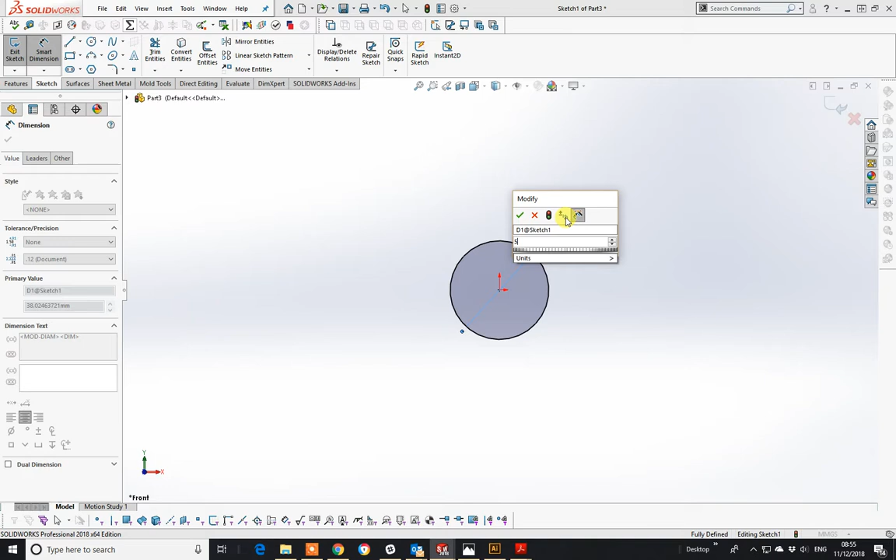Okay, then go to Features, and then go to Extrude Boss Base. Just one second, you'll see what I mean on that, and that is at a depth of 4.5.

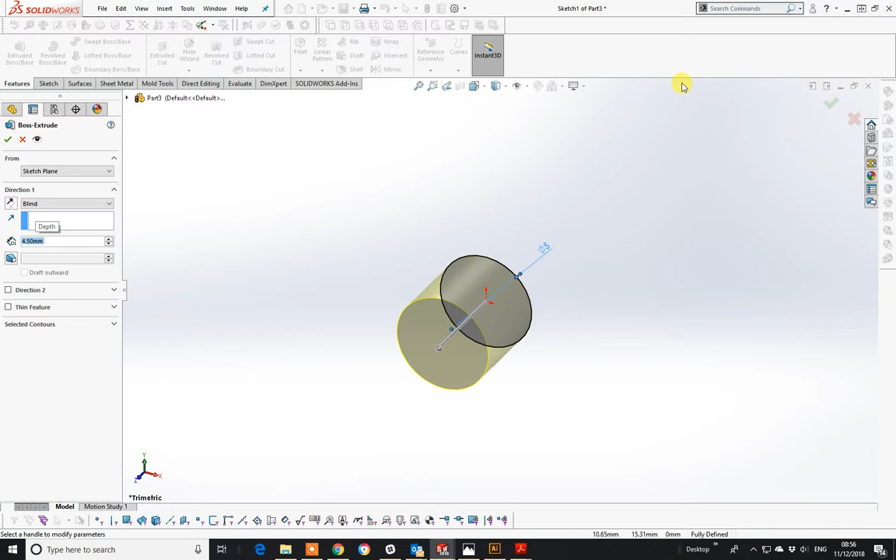Okay, I'm just going to pause. So I've actually created the hand part of that claw, so just press spacebar. I'm going to come in on that end, and I am actually going to put that centre bit in now as well.

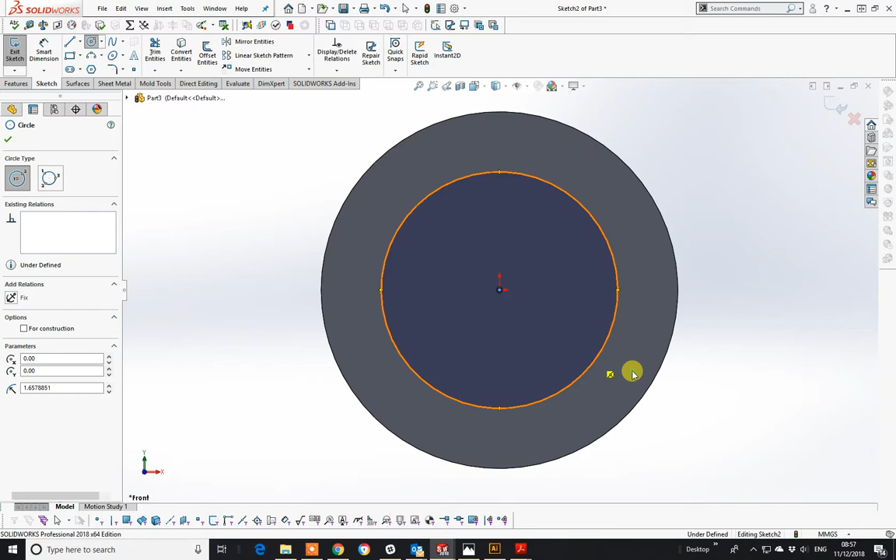So again, I'm going to go to Sketch on there, go to Circle, pull out, and that is a diameter of 3mm. Put that on there, almost.

Okay, and I'm going to Features, Extrude Cut, and when the computer catches up, that's it, and go through all. Okay, and then we've got the sort of main part of the claw.

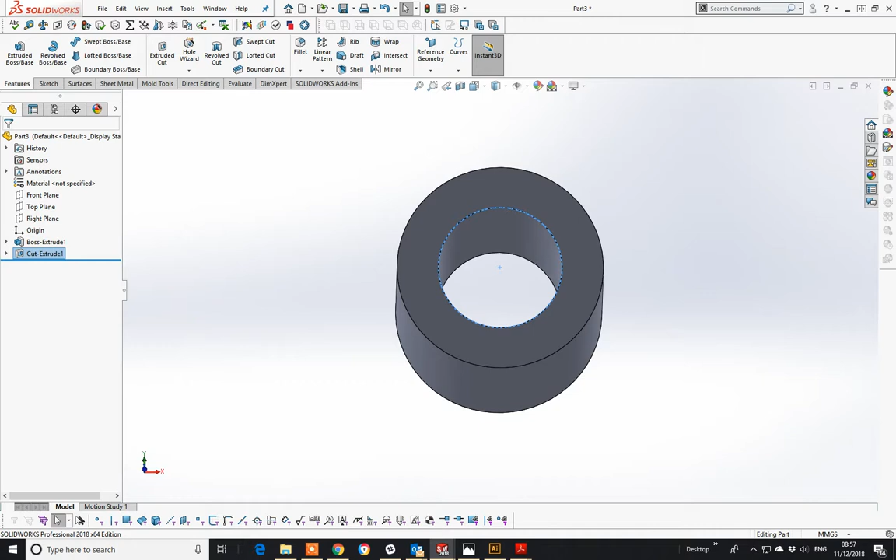Okay, I'm going to draw another line that side. Now, I could do this with a rectangular tool. I just want to show you something on there, and I'll do the same on that side.

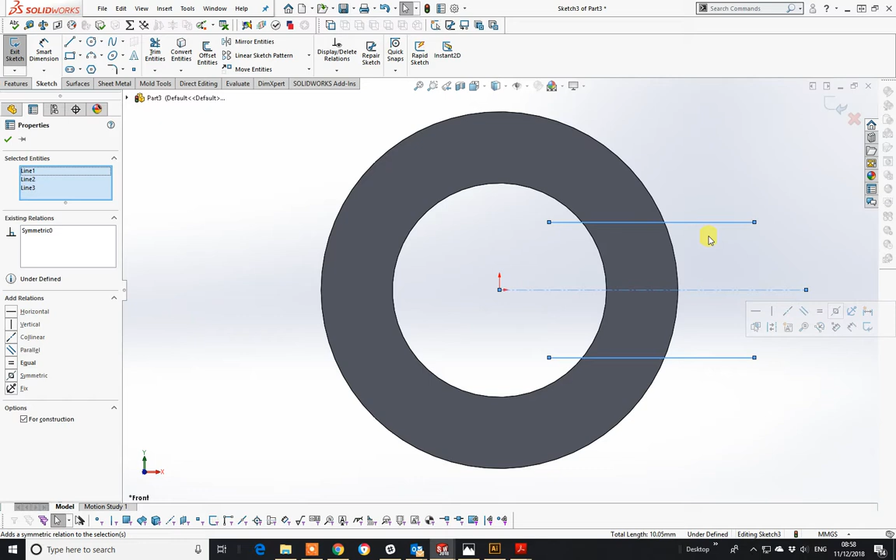Okay, now what I'm going to do is hold the shift key down, select that one, and select that one, and I'm going to make that symmetrical around that centre line, and just draw a line from there to there.

Now yes, these should be defined, but it doesn't really matter at this point. Actually, I will make it defined. I'll just do that on that point there and make that coincident.

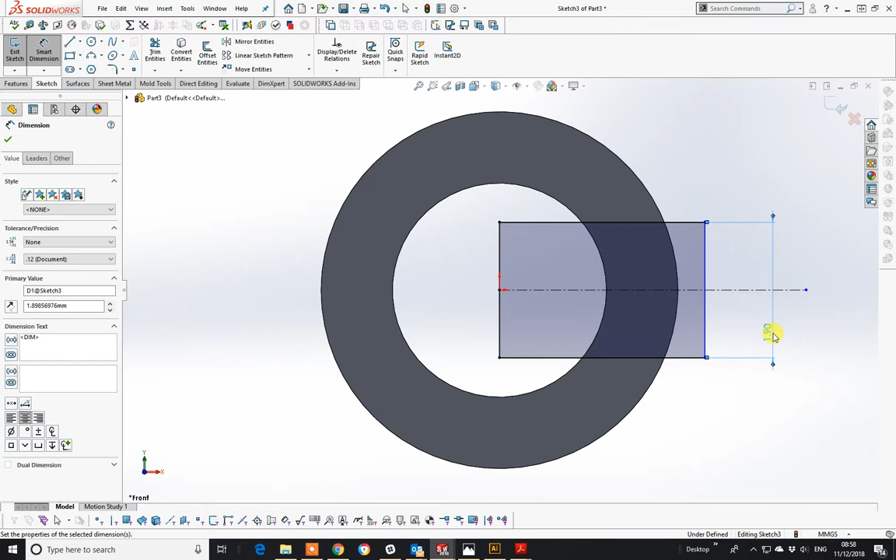Okay, and just to tidy things up, I'll put another dimension into there, make that 3. Doesn't have to be, but I'll do that. If I do that, now I shouldn't have done that.

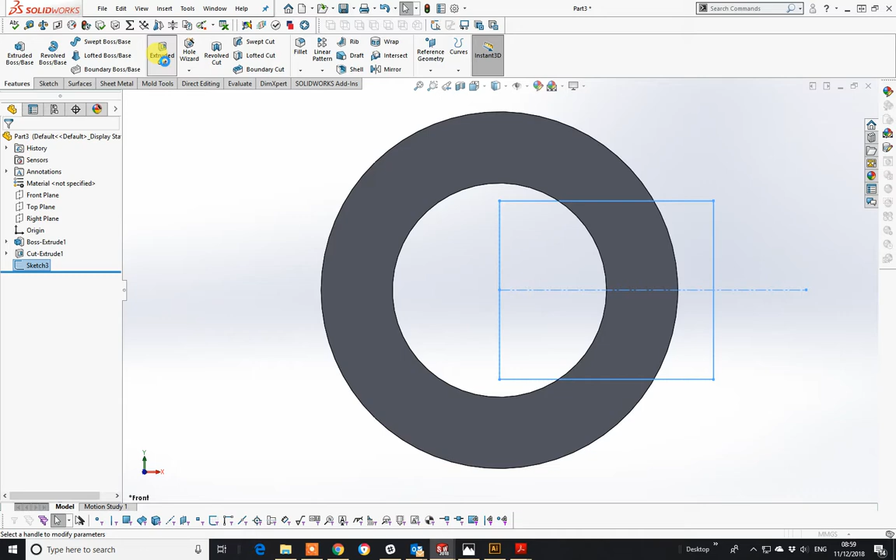I should just go to Features and Extrude Cut again. There you go, and it should maybe select it automatically. It has. Make sure that is onto through all. Okay, and there we go.

I've got that claw part of the hand. Now I need to bring in the next part at an angle, so I'm going to use a different plane for this one.

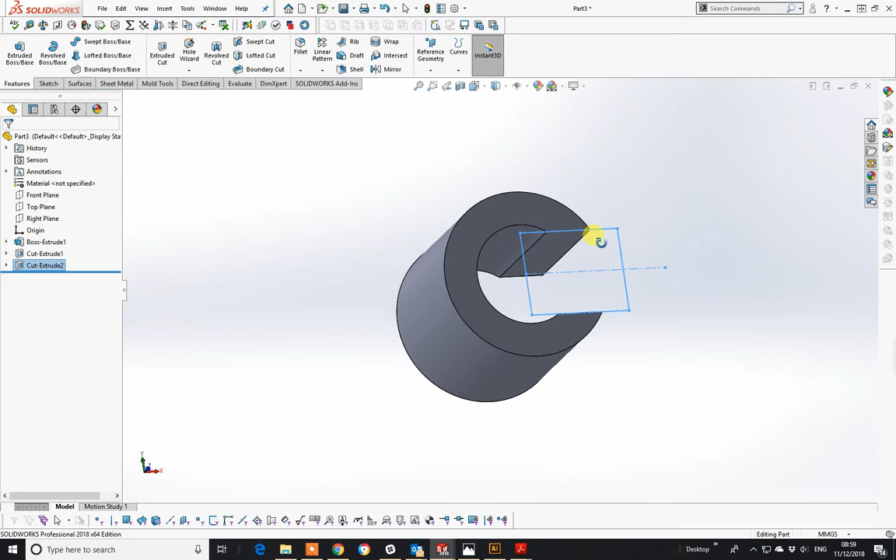So let's press spacebar, going down there, so I've got my side view. If I just change that to transparent, you can see what we're actually going to do.

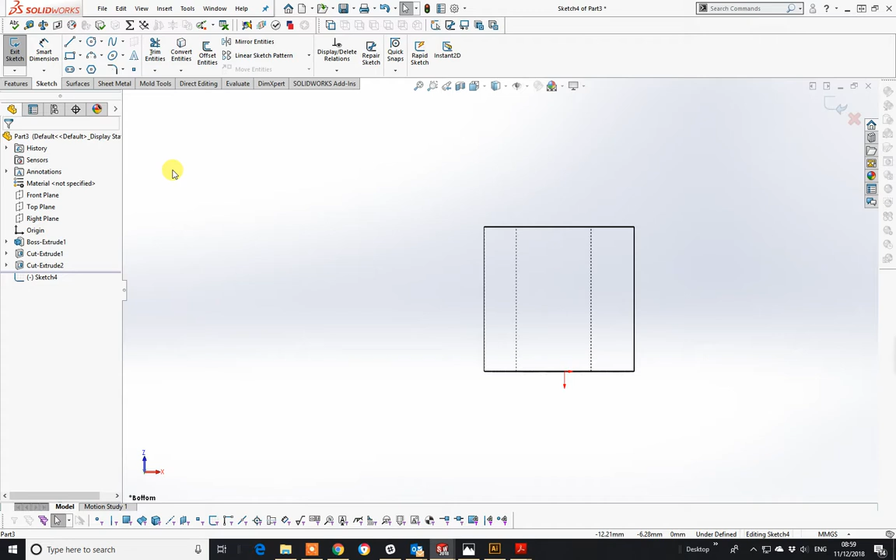And this I'm going to sketch, okay, and I'm going to just look at which plane I want to do this in. So it's not that one, it's that one there, and I'm going to sketch a line roughly from out here somewhere to...

somewhere there. Now I have no idea at the moment. I know what angle that's got to be, so if I just put an angle in, let's put that in there to there at 10 degrees.

Okay, so I know that's there, but it does actually look too big, so that needs to be further out. What else have we got here that I can take reference from?

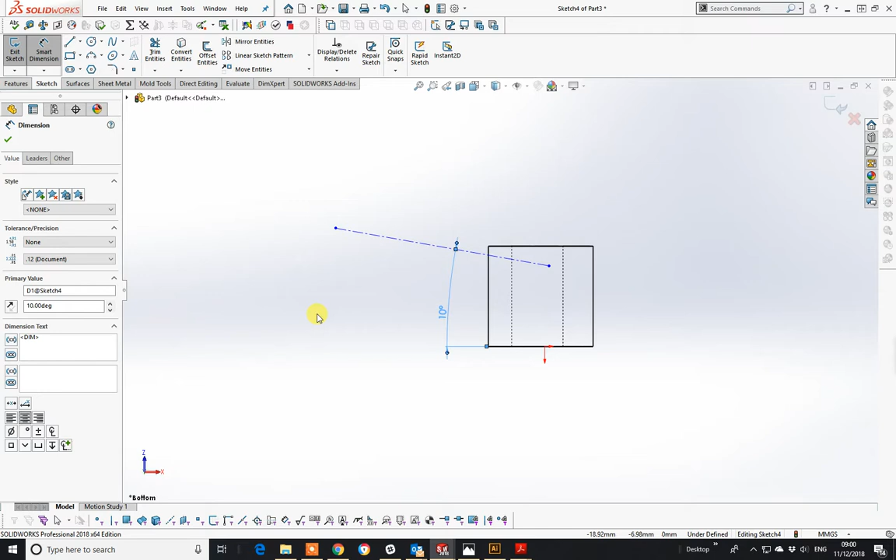Okay, I'll put a construction line of 3. This is the one that goes in at 3mm.

So if I just, this is purely construction - there are some points missing, so do that at 3.

Just to find my point from that and how that interfaces, because I'm looking at the end mark of one of the lines.

So if I actually make - just hold on one second. Okay, I'm going to put a line at 1.9 from the base.

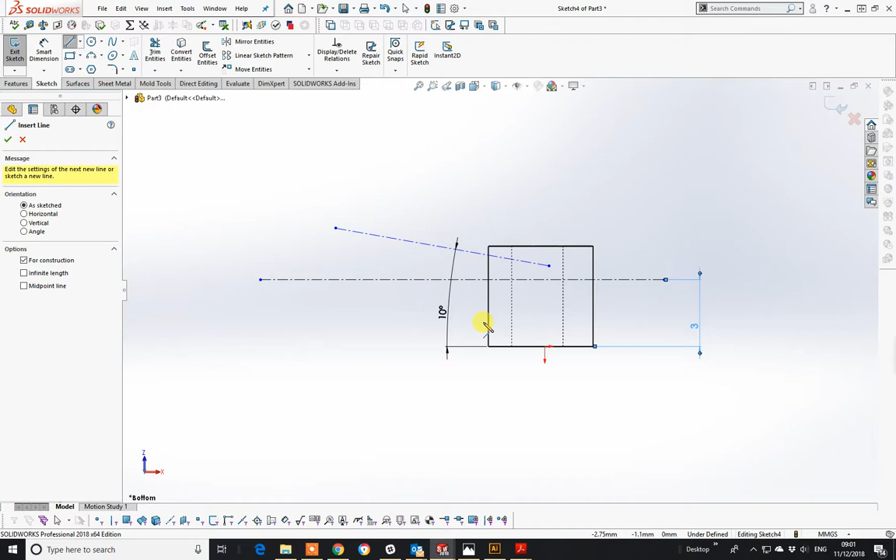So if I just take that line there, as you know, I'm just going to change that dimension there, makes it easier for me, at 1.9.

Okay, right, I've got a point now that I can start from. So I'm going to draw a line from approximately there out to there.

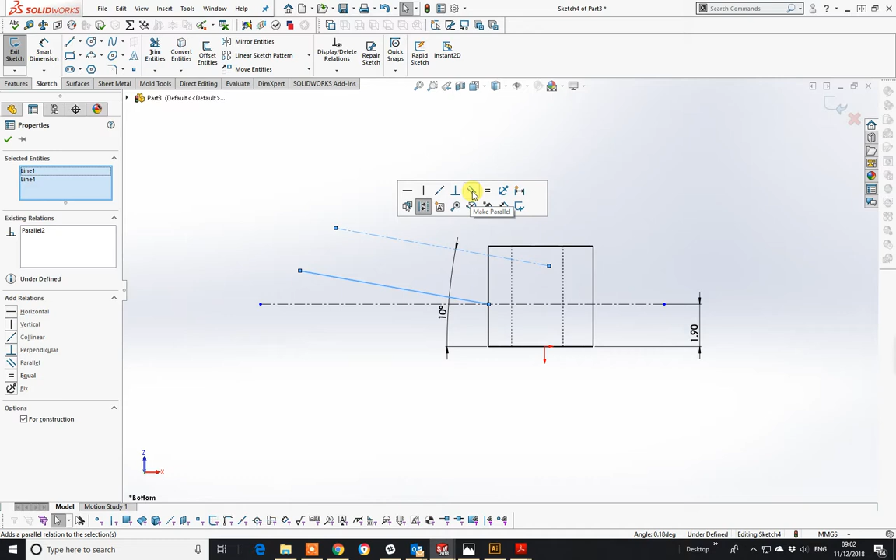Okay, and I'm going to make that line and that line parallel. Okay, take a little bit of time.

Now I know that's 2.6, so that centre line, I'm going to just do a centre line. Again, these are all construction line.

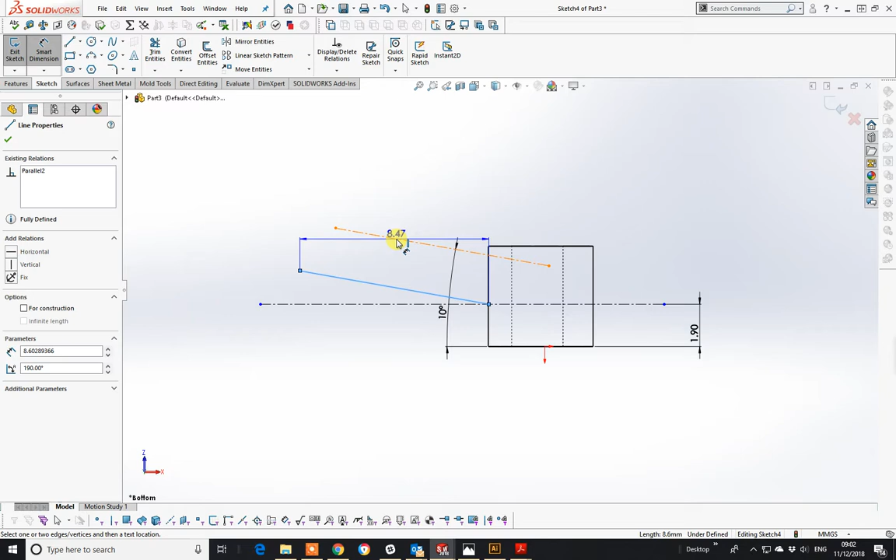That centre line is my smart dimension from there to there. I want that at - and there's a little trick you can do. If I just go 2.6 divided by 2 will give me 1.3. So I now have the centre of where I need to bring that hole in.

And I do apologize for the dog barking.

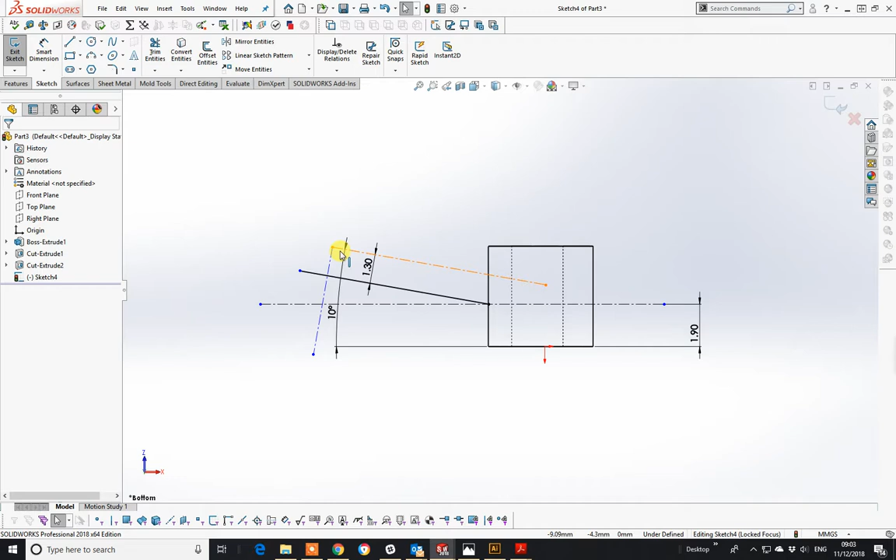I also know that from that point there to a point there is 10.65. So if I draw another center line off the end of that one and bring that down, make sure that I've got a fit there between there and there perpendicular, which it is, that's fine. Now let's bring that line in to be interference with that one.

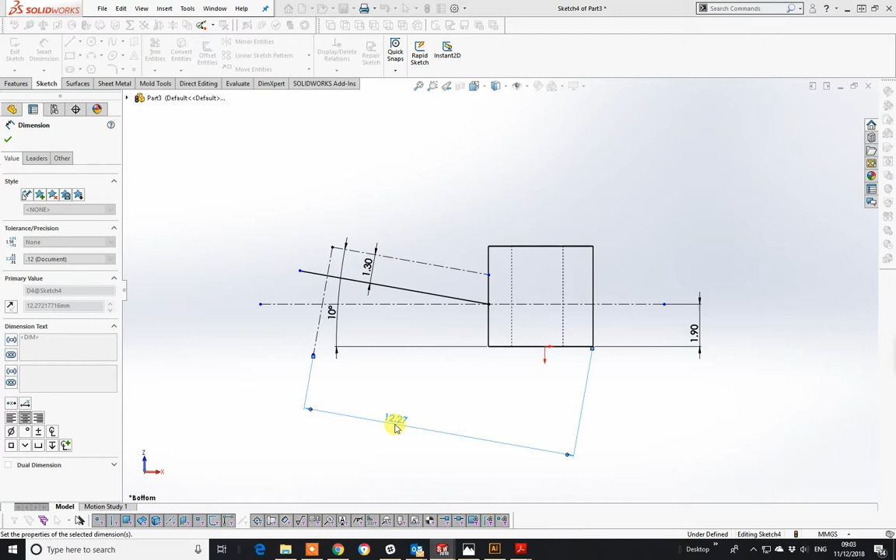Smart dimension from that point there to that point there, and I'll make that 10.65. I now have the end point where I can put my diameters on. Let's give that a green tick, I'll tidy this up later on.

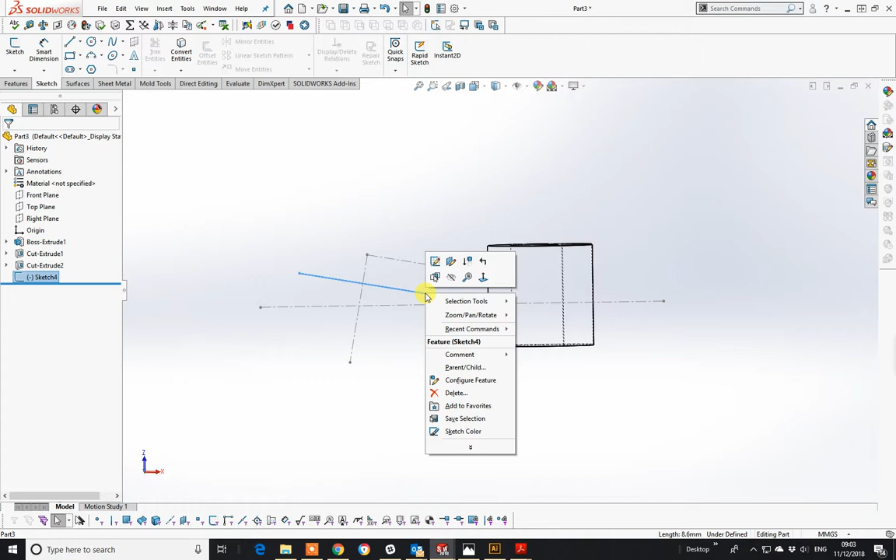I can actually now get rid of this line here. Let's just delete that - no, don't do that. I have to go back into edit sketch. Actually, I'll just convert that, go back into edit sketch, do that one there, and do it that way.

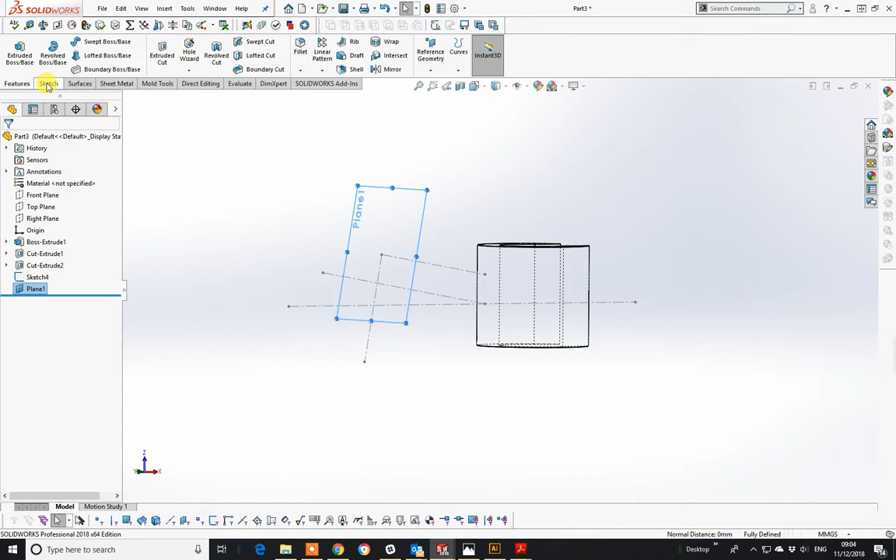I am now going to go to features, go to reference geometry, go to plane, click on that endpoint there and on that line there. I'm now going to sketch in that plane and draw a circle in that point there.

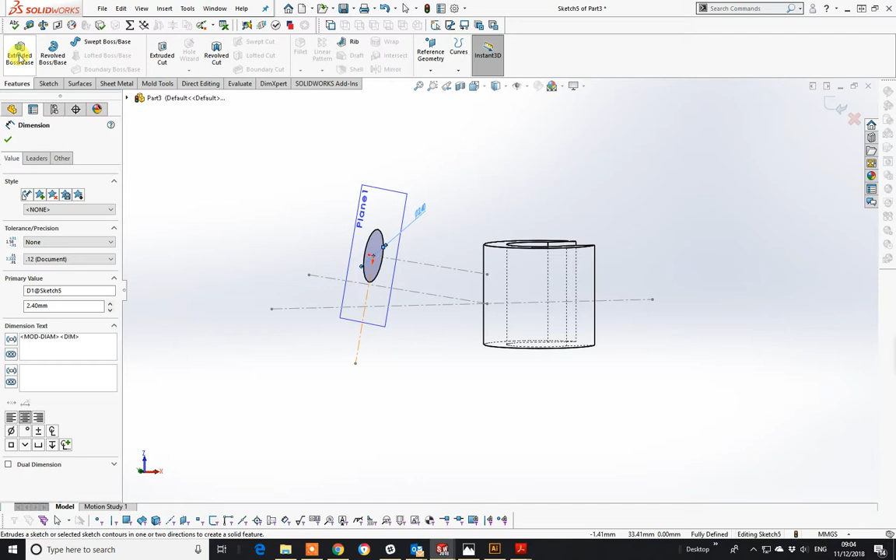I know that that circle, if I just give it a dimension, is 2.4. And I'm going to extrude that by 4 millimeters. So if I go to features, go to extrude boss base - it's just taking its time a little bit - and make that 4 mil.

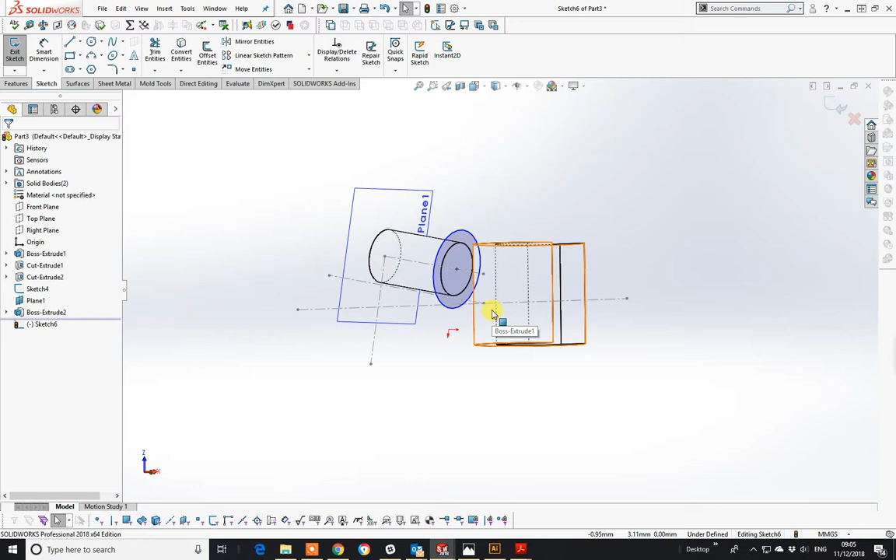That's perfect. I'm then going to go in on the end of this one, so I'm going to go to another sketch on that face and draw another circle from that center out. I know that that is a diameter of 2.6, so smart dimensions - 2.6.

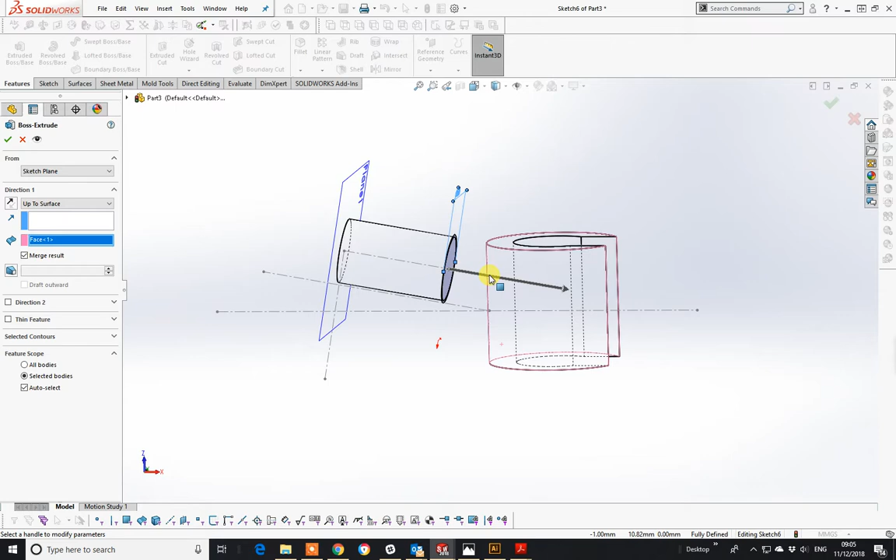Then again features and extrude boss base. It's taking its time, and this time instead of blind, I'm going to go up to surface. I'm going to click on that point there - it doesn't like that, or it's just thinking about it. Let's just see what it does. Yes, it's done it, so therefore we've got our interface there.

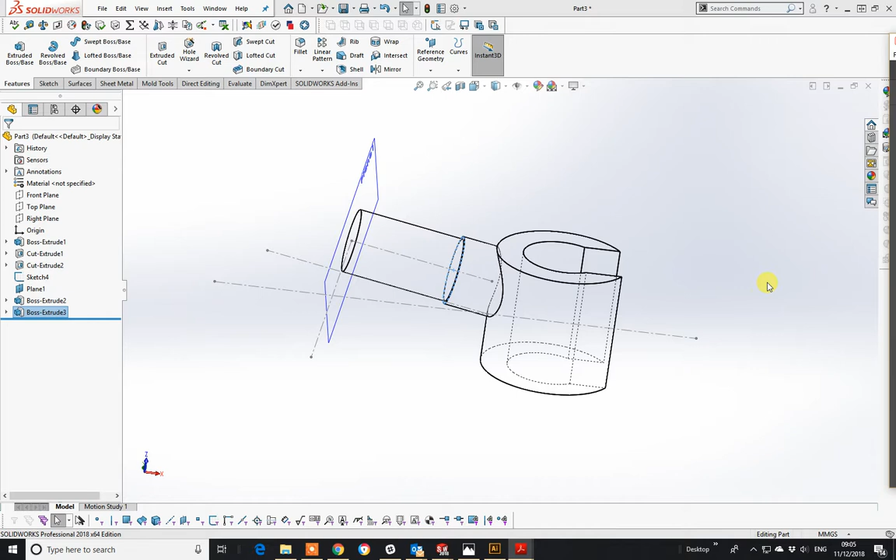Now what we need to do is put on that radius at the front, which is actually a little bit complex, so I'm going to do that in a slightly different way. Let me make sure I'm on the right screen. Here we go - now it's 2 mil round there. So how do we do that?

I have to do that as a cut, I think. Just let me double check that - yes, it's 2 mil. So I'm going to go and sketch in the center plane here again. I go to sketch, choose my plane - right, it's that one there.

And I'm going to draw - let's do a center arc. Actually, I'm going to cheat and do a circle. I can't do a perimeter circle, so I'm just going to do a circle. Just watch this for a second - click on circle, you'll understand in a minute what I'm doing.

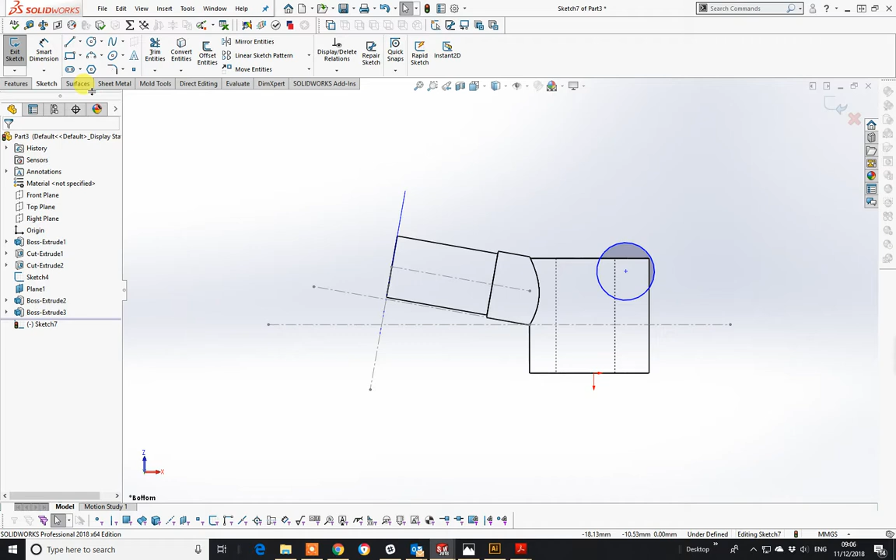Now let's do that as a radius of 2, so smart dimensions - okay, a radius of 2, so that's a 4 mil circle.

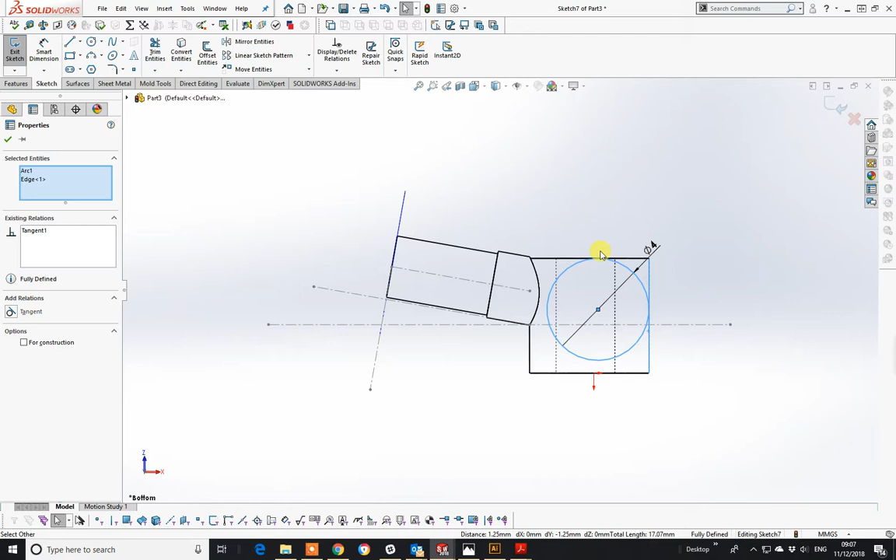I'm now going to click on the circle, hold the shift key down, and make that tangential to that point there. I'll then just press the escape key and do tangential to that point there as well. I've now got that arc that I want to have, but I need to get rid of most of the other stuff.

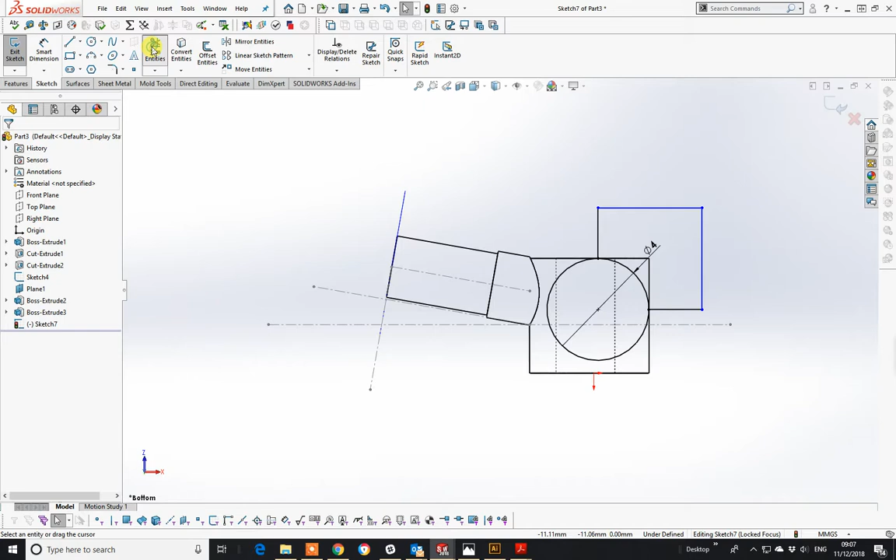So I'm going to draw a line from there to there - I'm sort of making a jig up just to cut away that circle down to that point there. I don't have to make sure that is fully defined because I'm using it as a tool. As long as that part's defined, go to the trim tool, click on that there, and then go to features, and then go to my extrude cut.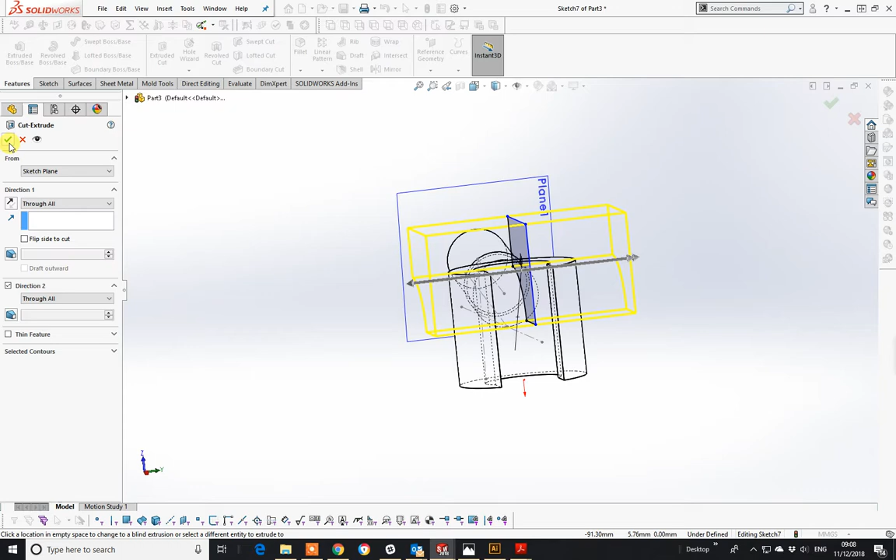It's just thinking about it. Go to blind, and I'm going to go through all - let's just see what this does. Just turn it around, it's gone one way, so I need direction 2 that way, and then give it a green tick. There we have my 2 mil cut. So let's just bring back on proper shaded part, and that is how your claw should look.

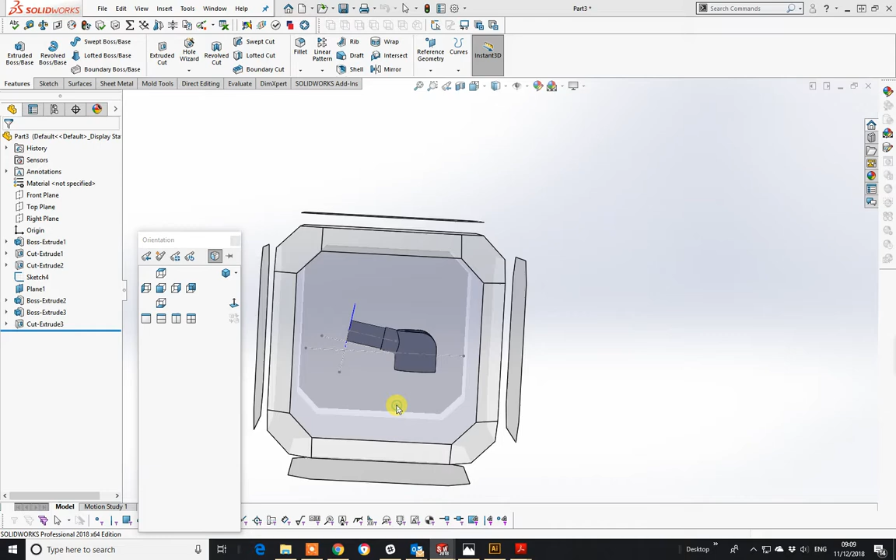Just spotted a mistake on this. I don't have time to rectify it at the moment, but have a go - it's around here, so just check all your dimensions. It may just be a slight adjustment of all these to actually get that to marry up quite nicely.

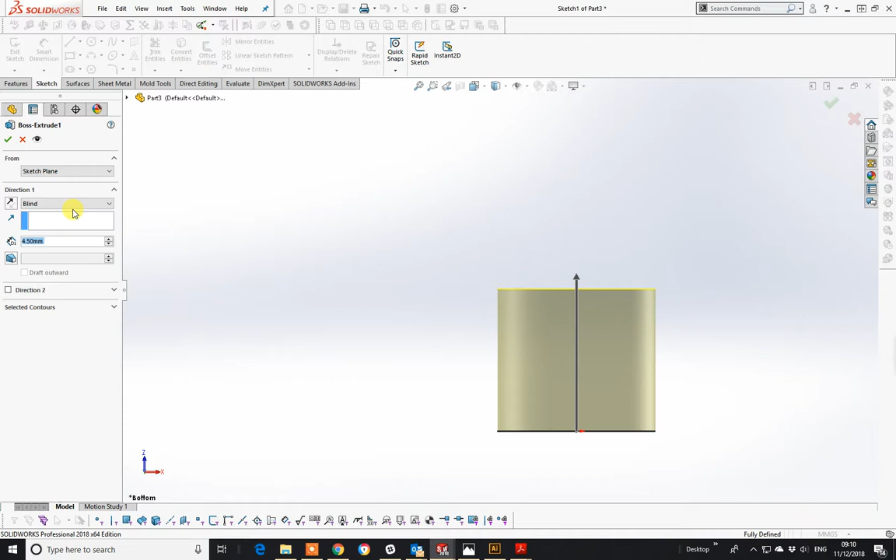Just going to check on this. I did actually extrude that out at 4.5 - yes, it is 4.5. That's 2.6, 2.4. Let's just check that other one - let's just check this is 2.4.

Edit feature - taking its time, that's been done for. I need to check on the sketch - 2.4, that looks right. And that should be 3 mil to the base.

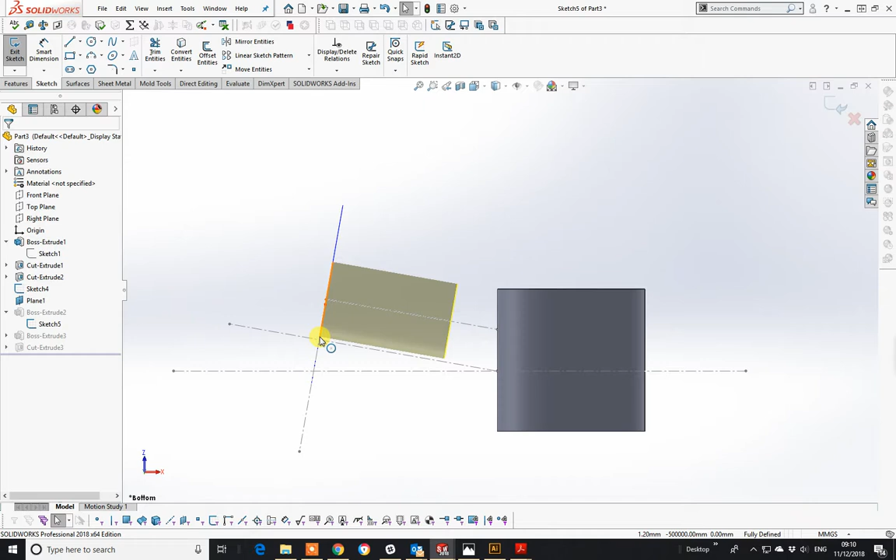So again, go to my little tool there - let's just come out of that a minute. Go to my little tool there, measuring tape, let's go from that point there. It's not going to let me do it actually - no, not going to give me the mark. I'd have to draw that in to do it, but have a check anyway - it's almost right.